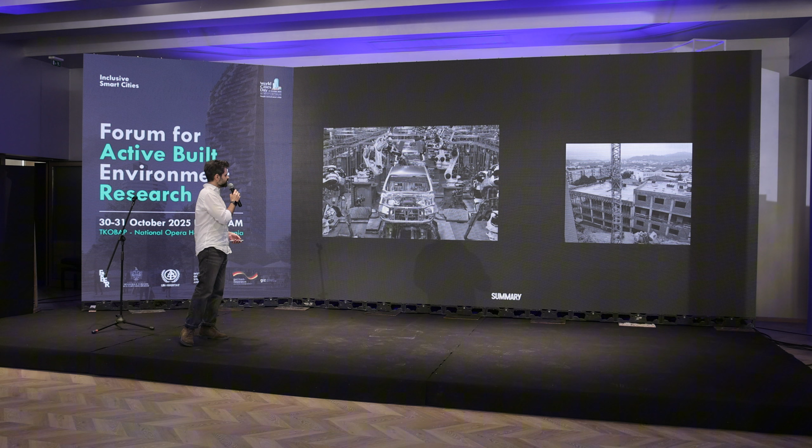So more than a century later, it is enormous, this disparity between the evolution of the automotive industry and the construction industry. Of course, we always have exceptions, but generally speaking, that's how we produce cars today, that's how we produce buildings today. And it's this delay of the construction industry that we are, let's say, fighting.

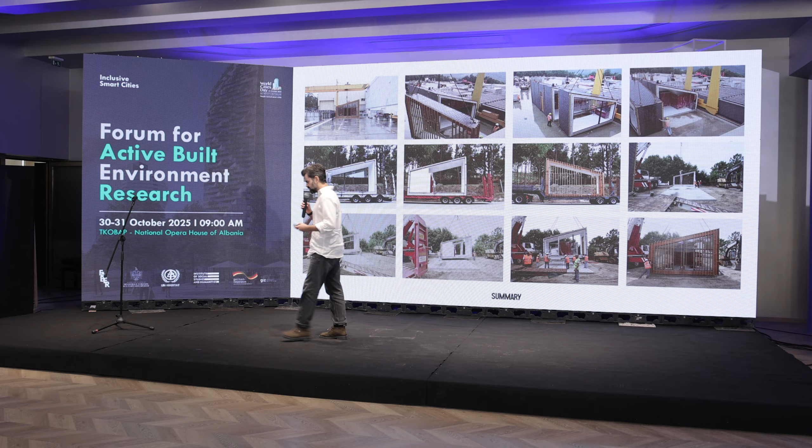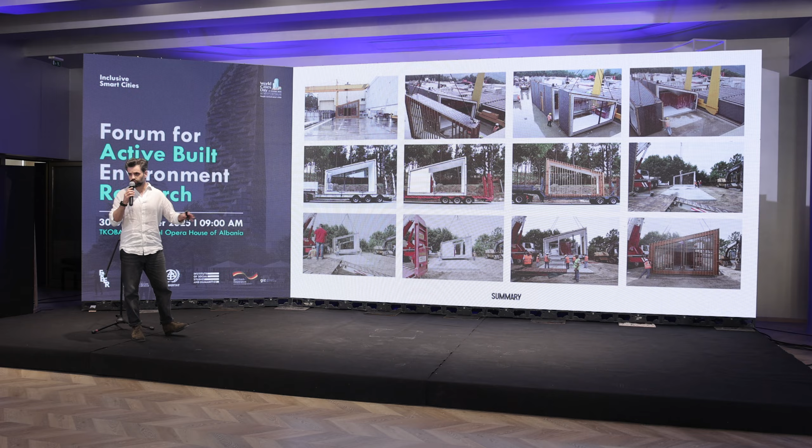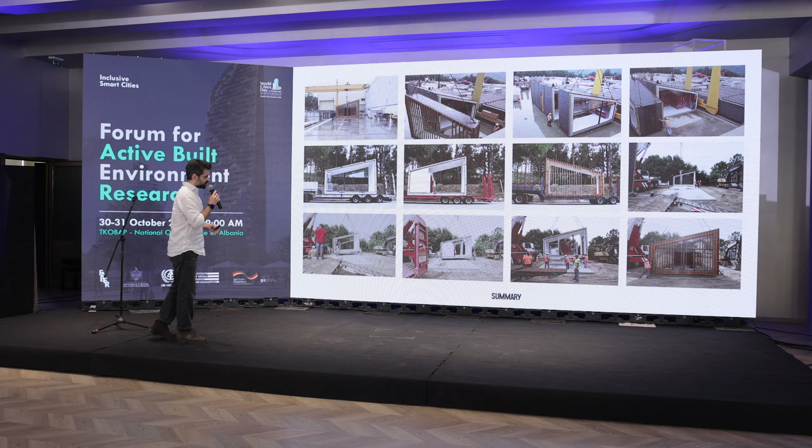We started 10 years ago doing it with, I would say, very modest means, far from the sophistication of the automotive industry. We just found a way to divide this prototype, this house, into 5 modules that were fully ready at the factory with all the claddings, the window frames, the furniture, etc., and we just assembled it on site in just 3 days. It was our first project, so it still has this special place for us.

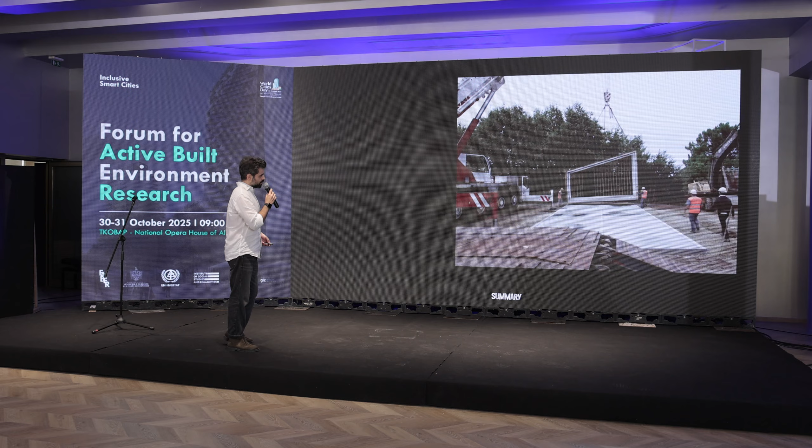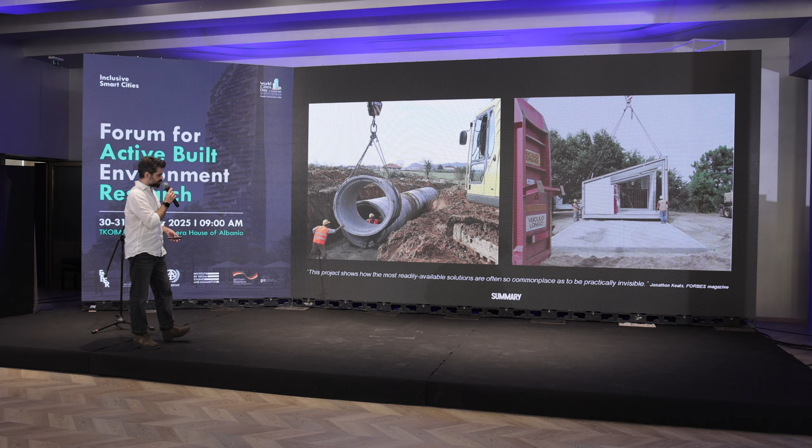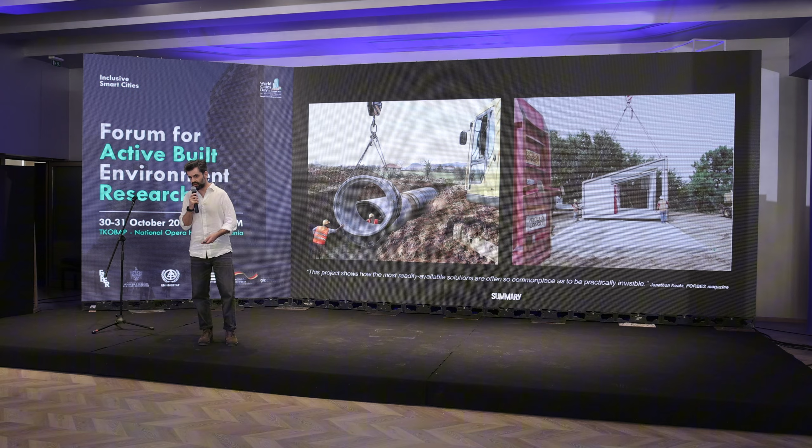But I always reinforce that we didn't invent this. We just took the idea of old sewer pipes and redesigned it to make it habitable. That's why I love this sentence from Jonathan Keats for Forbes magazine: this project shows how the most readily available solutions are often so commonplace as to be practically invisible. So our job as architects sometimes is not just about inventing, it's also about unveiling those hidden solutions.

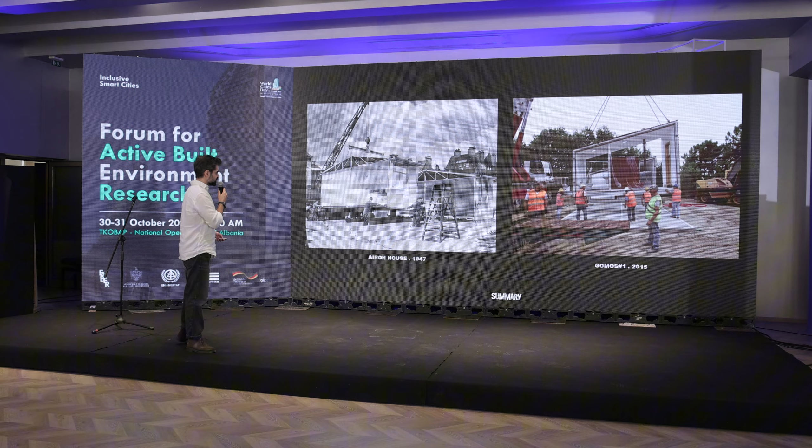It is a project 70 years older than ours, the AIROH House, and they were already using the same concept. We use concrete, but I would say the tectonic concept is quite the same—slices of the construction fully ready from the factory and assembled on site very quickly. Or the Zip-Up House from Richard Rogers—again, not innovation at all, it's reprocessing.

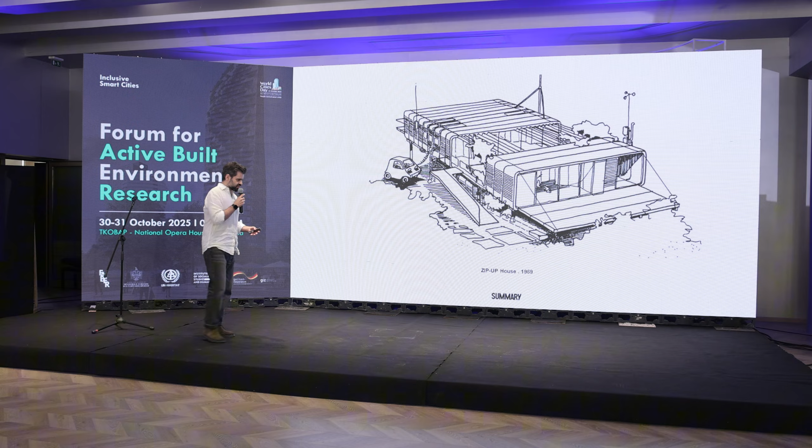So I would say that the history of prefabricated architecture is being built with cases like that—similar solutions being applied by different architects. It works as some sort of ecosystem of ideas that some architects manage to materialize.

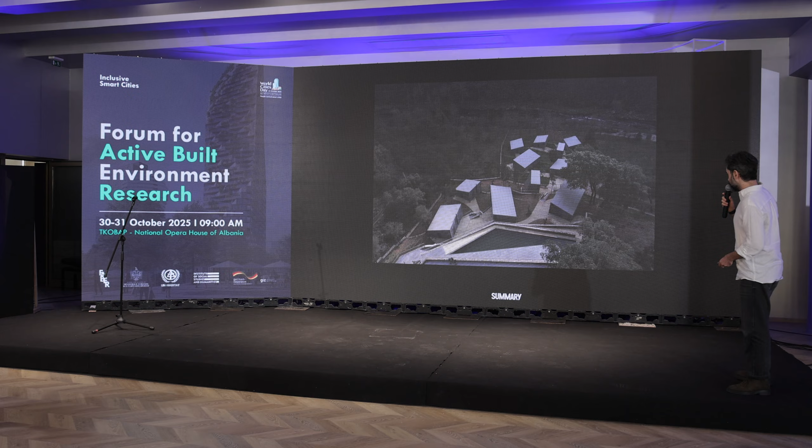After La Biennale, we got some commissions to develop projects with these three-dimensional modular systems. This is one of them: 11 cabins in the woods, on this hilly plot. In this case, we needed to divide each module into two submodules, a base and a top. The access was so difficult, the plot so remote, that we needed to divide the module to divide its weight, because we could not bring the big crane we normally use to assemble those modules.

This way it was possible to assemble the modules with a smaller crane, and in off-site architecture, I would say logistics are always part of the design. So we started by placing these units over the hillside, combining different positions with different orientations to make sure every unit has a view of the landscape and the river.

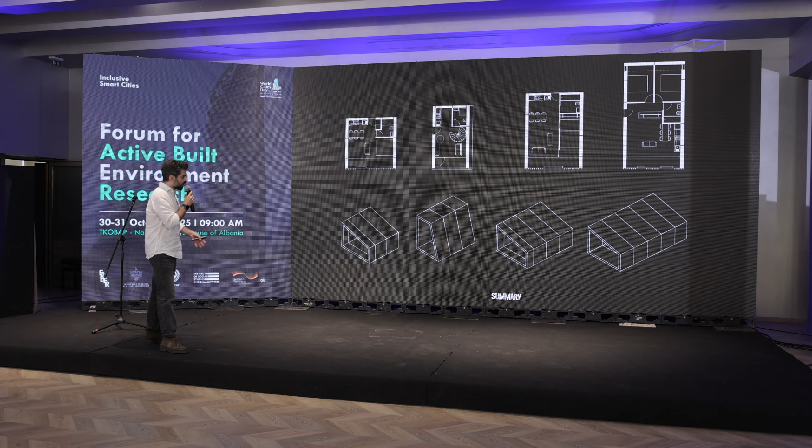So rather than rooms, they work as small houses—some of them may function as long-term accommodations, so they are not exclusively touristic and seasonal units. And we might have these different typologies by combining more or fewer modules, placing them horizontally or vertically.

We also used this project to start a new experience with this building system. Before, all the technical installations were inside all the modules. In this case, we did something different: we concentrated all the technical parts—water, electricity, and climatization—in this central module here.

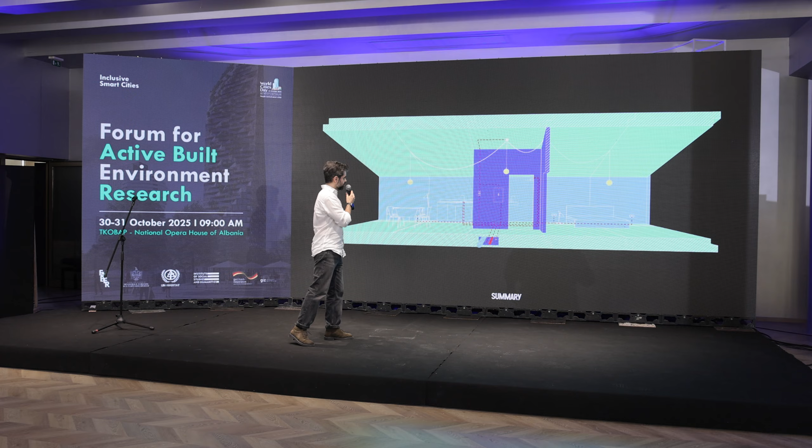So this is a central technical module, and these technical installations we take to the rest of the house externally. These central modules take longer to be produced, but all the others can be produced automatically with very little man intervention, taking roughly half of the time. That's why you see here the cable flying under the ceiling externally.

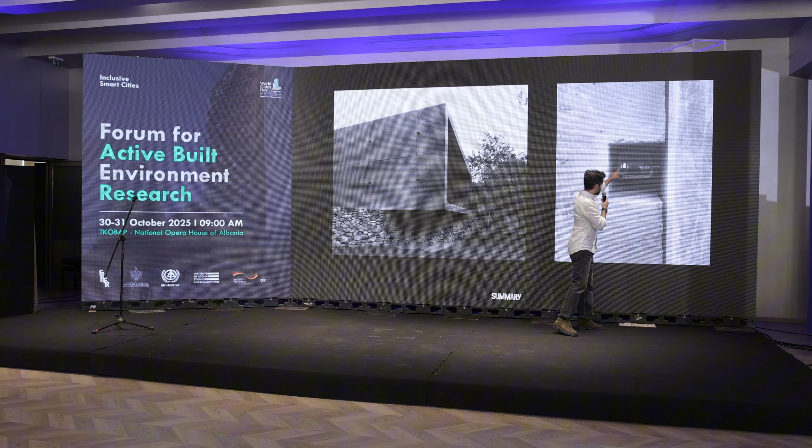Here we have the connectors between the different modules. They basically work as a central ring and two screws, each going to the correspondent module. The more we tighten these screws, the more we pull the modules together. Inside the joint we have an asphaltic rope, and when we tighten the screws, we smash this rope. This is what makes the joint completely watertight.

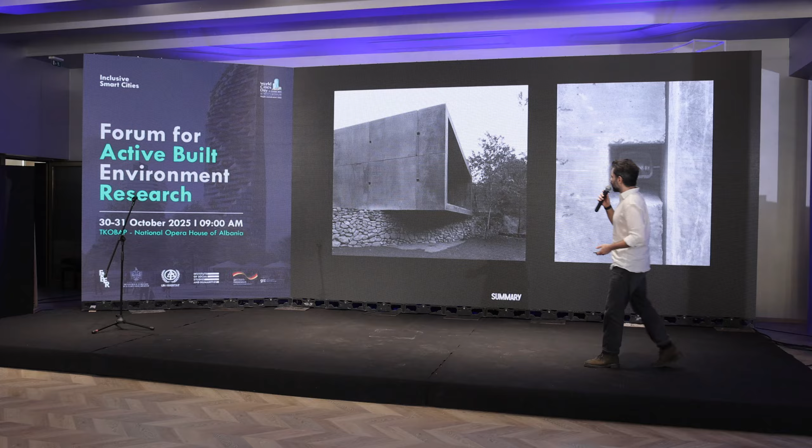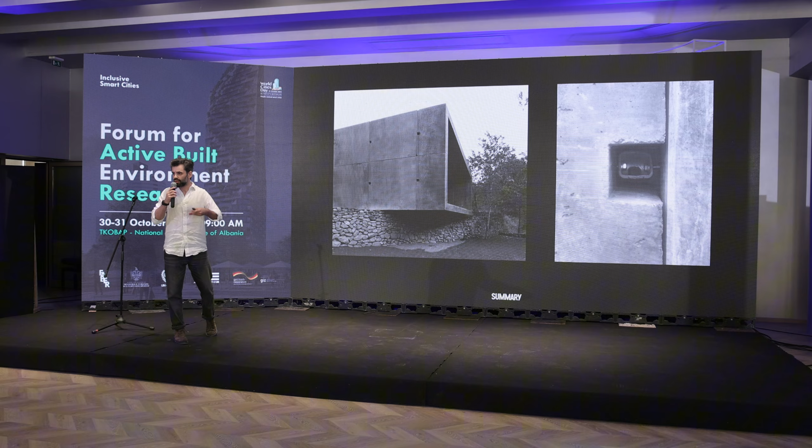As you saw before, this project is very close to the river, so we never know what the level of the water will be in the future. At some point we can just remove those connectors and move these modules, move this building somewhere else. So we make this effort to work with dry connections, so that we can approach this concept of design for disassembly as a strategy to potentially extend the life cycle of materials, the life cycle of the building components beyond the building itself.

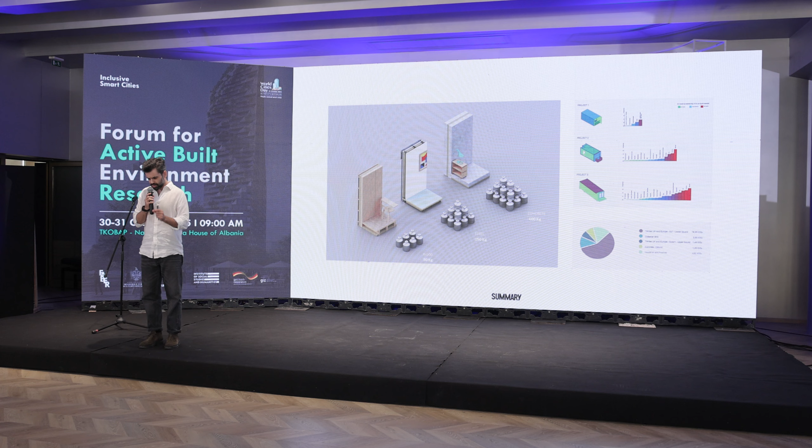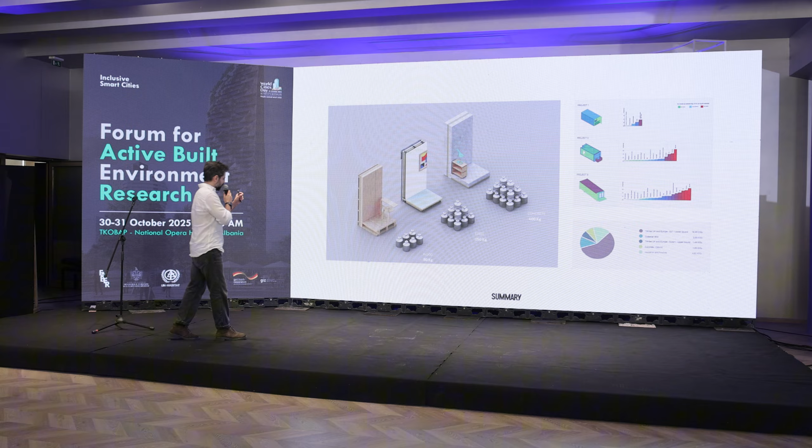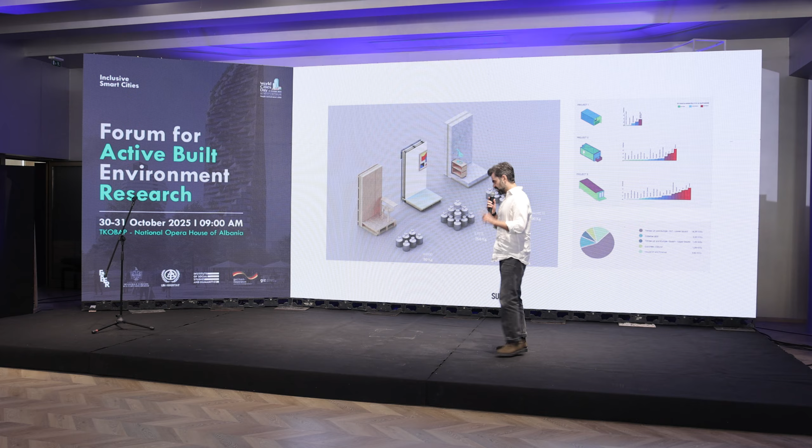And why is it important? It is important because we demolish too much and we produce far too much waste in the construction industry. In the United States alone, every year, more than 100 million square meters of existing buildings are demolished and replaced by new ones. 100 million square meters.

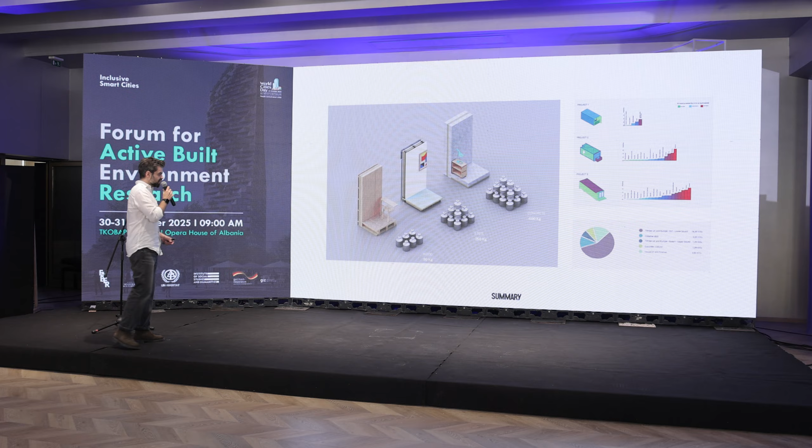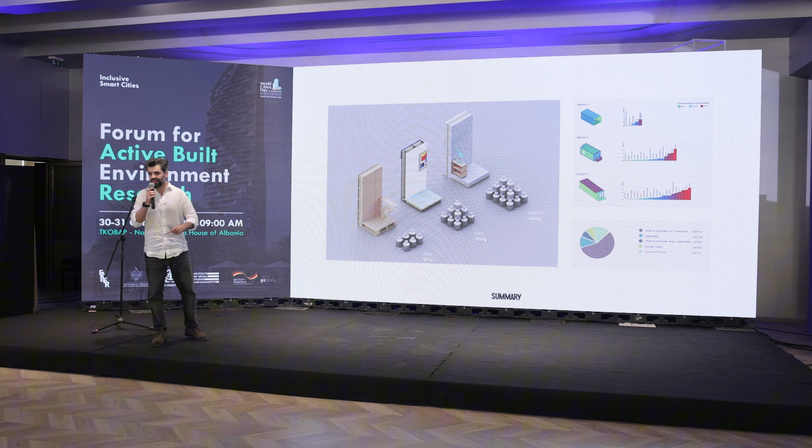We have been calculating the weight of the CO2 emissions of the construction processes of our buildings, and we are getting, per square meter, values such as 80, 250, and 400 kilograms of CO2 when working with wood, steel, and concrete respectively. So this is the invisible environmental weight that we need to acknowledge.

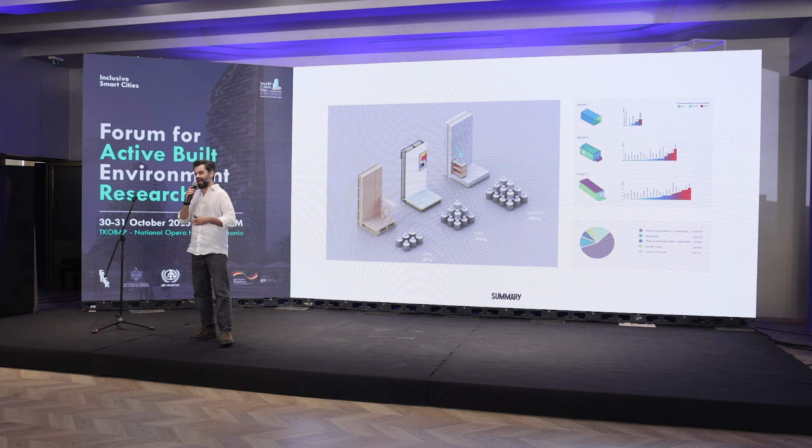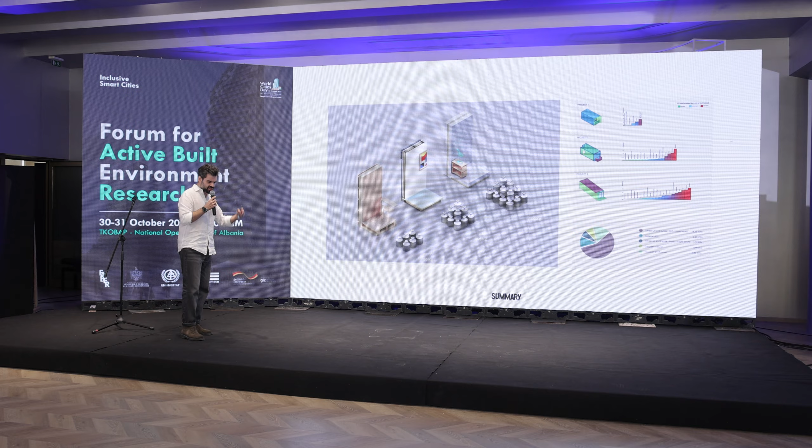We as a society reuse and recycle everything, from plastic, clothes, bottles, everything but buildings. And trust me, the building industry is the most pollutant one. I believe that through its potential for reuse and modular reassembly, off-site architecture is a powerful tool to tackle this problem, to tackle the construction waste.

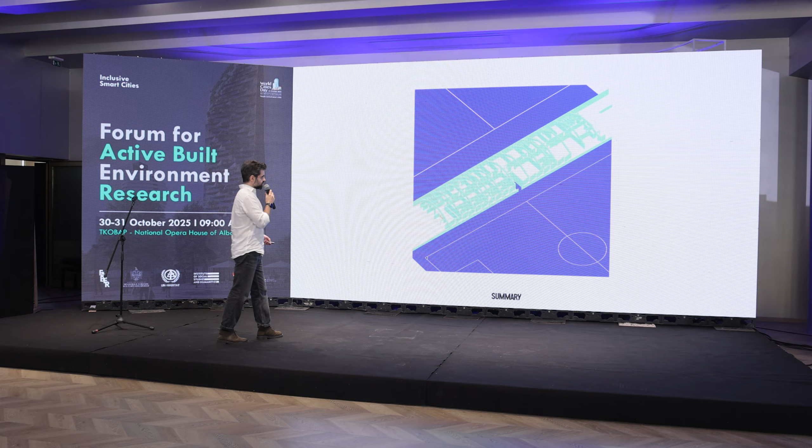A different project with bidimensional prefabricated elements started from a public competition for a sports center, to design 2 grandstands and 1 building, the typical sports center building with locker rooms, a bar, a medical center. The 2 main factors in the evaluation of this competition were the building price and the construction time.

So we compacted all these different elements of the program into a single structure. We have the grandstands one against each other. Underneath, we place the buildings, so the grandstands also work as the roof of the building at the same time, and all of these share the same structure. With this compaction strategy, we managed to accelerate the building process and also to do it in a very affordable way. So it's a very pragmatic and austere building, and I would say it is self-explanatory. Above, we have 2 grandstands. Below, we have a building.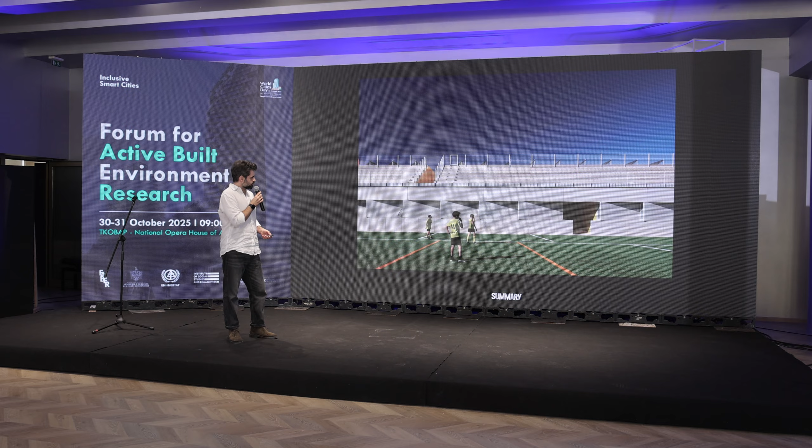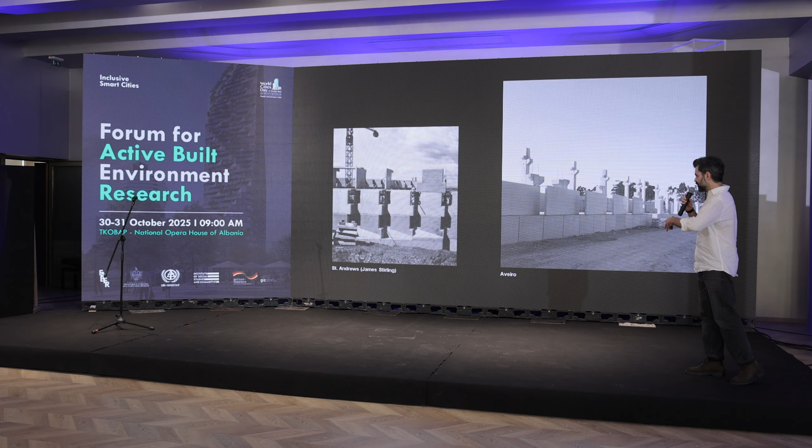And it takes me to the project of the St. Andrews Students' Residence from James Stirling. The influence is quite obvious, and I'm not just talking about using these big concrete panels as structural elements, but how we are using it to influence the design of the facade. So again, when working with off-site solutions, we are always working with references, and we are always studying these references.

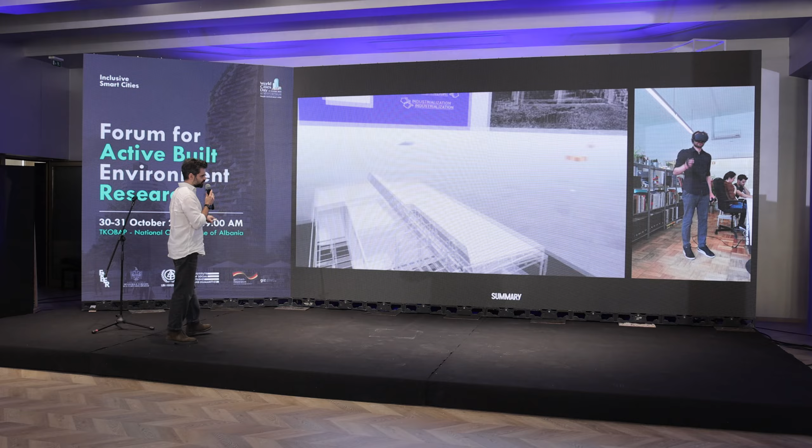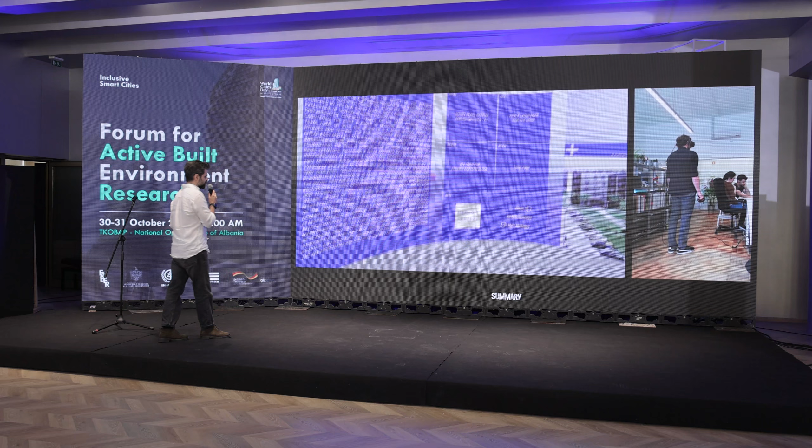That's why we developed this virtual exhibition, curating a group of 25 building systems that we considered important in the historical evolution of prefabricated architecture. In this exhibition we just showed the classical triptych of any architecture exhibition: images, texts, and models. But we do it in this virtual way, so it is almost an immaterial exhibition. By the way, we have been showing this exhibition in 7 or 8 countries, from Portugal to US to Germany to Scotland. But its very first edition was here in Tirana 7 years ago, in the frame of the Tirana Architecture Week. So it's good to be back.

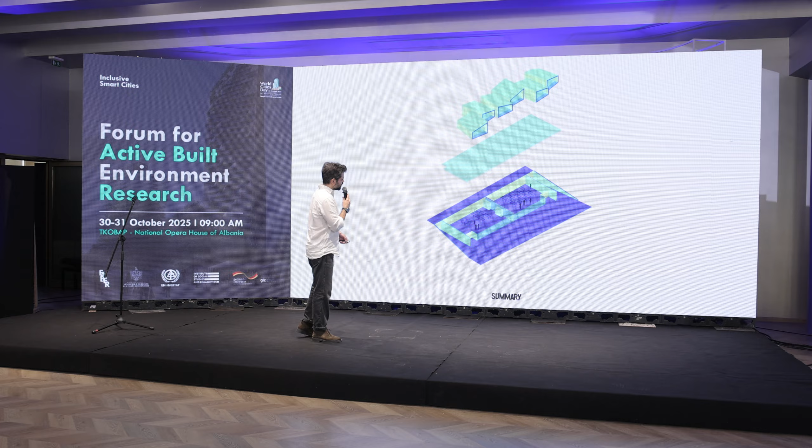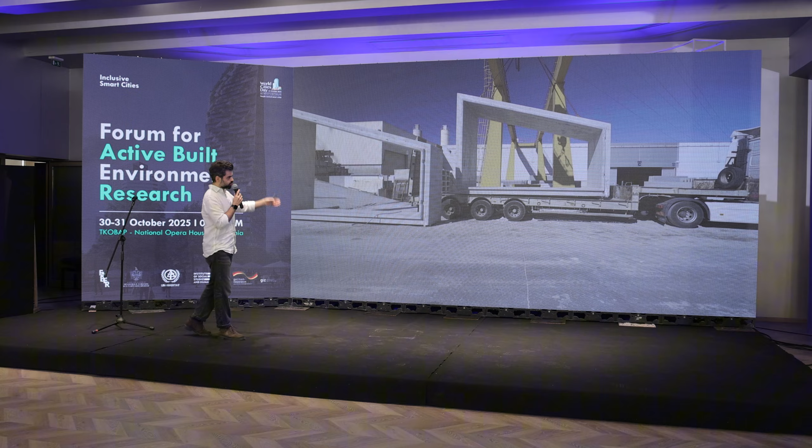In this project we used again these big prefab elements in concrete: 6 small apartments in the upper floor, and an undefined multifunctional space in the ground floor. All the structure is off-site, produced and stored in factory, and then, when it's the right moment, it is just assembled on the site in a very quick and clean way. So we used those panels in the ground floor, bidimensional. We used these volumes, 3-dimensional, in the upper floor, both with insulation from the factory.

The front facade is quite open, facing the public. So through this image you can understand the structure of the whole building. The back facade is quite more private.

The idea here was to design and license this building as a collective housing building, but keeping some advantages of individual dwellings, such as complete acoustic separation between the different units and a single entrance per each unit. Here we have the constructive details: concrete inside, concrete outside, but always insulation in the middle.

Those are the pieces as they leave the mold. We have concrete inside, concrete outside, no additional paintings, no additional materials.

This means reducing the manpower needs and the materials involved in the construction process, which also means saving time and money. Working mainly in the factory and reducing on-site works doesn't mean only rapidity, it also means giving better and safer conditions to the workers.

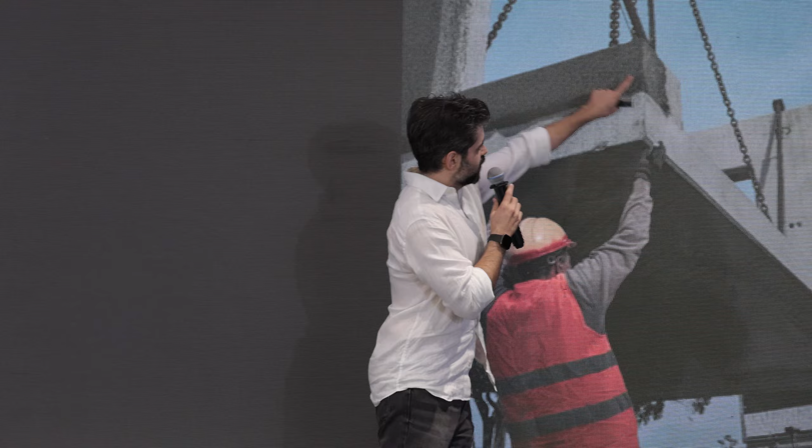Then we transposed it to vertical prefabricated panels, and later to these U-shaped elements with this external layer of rice husk. In this case, this external layer works as the outer cladding, but also as the thermal insulation of the building.

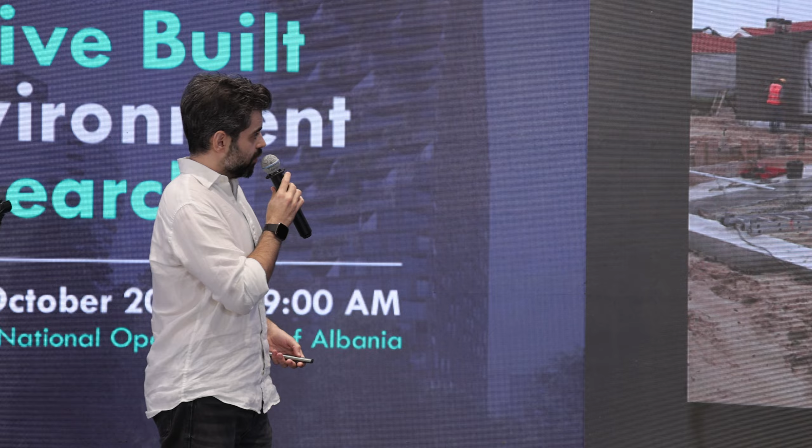So we used again the same pieces we used in the kindergartens to build this small prototype using this rice husk external layer. Okay, I'm just finishing with the last project.

Here we have 48 apartments. We have been working a lot with public housing in Portugal right now, and this is one of these projects.

It is the first time we are working with three-dimensional steel modules. So what we have here is steel frames that are cladded and finished in the factory, then stacked on site. It is a clear example of prefabricated, pre-finished volumetric construction, so PPVC.

In each module, we have these 4 square hollow section tubes working as pillars, let's say. Inside those pillars, we run threaded bars that clamp the modules together vertically.

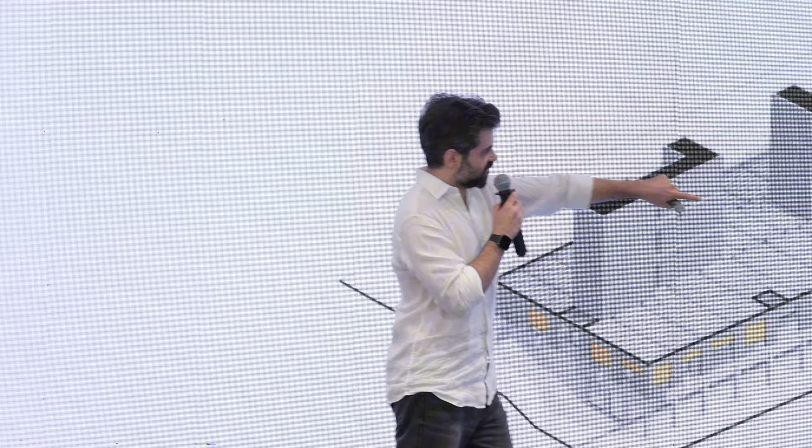Inside, we cast in the traditional way these 2 central cores with the elevators and staircases. They are essential for the seismic performance of the building.

At the same time, we are preparing those steel modules, and then we just set them in place. We anchor them to the central cores, and in the perimeter we apply this flashing to make sure the horizontal joints between the different modules are completely watertight.

So in each floor we have 28 modules composing 6 2-bedroom apartments. It is public housing, these apartments will belong to the municipality forever.

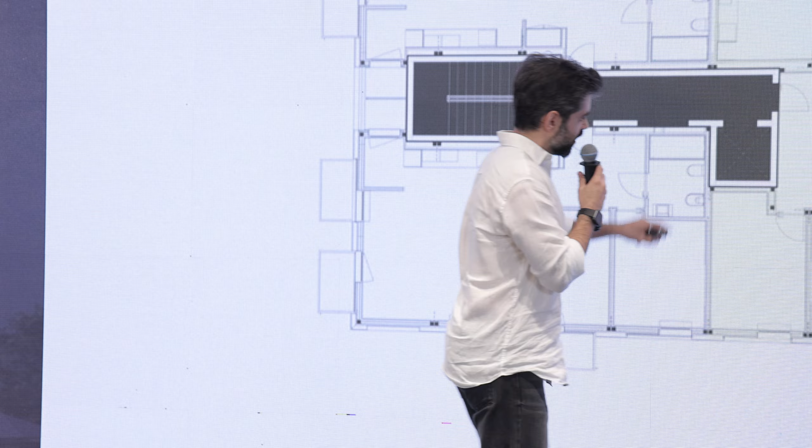In this scenario, flexibility was very important. So in these 2 central apartments, we just added this movable wall so that we have 2 2-bedroom apartments today, but tomorrow we might have 1 3-bedroom and 1 1-bedroom apartment.

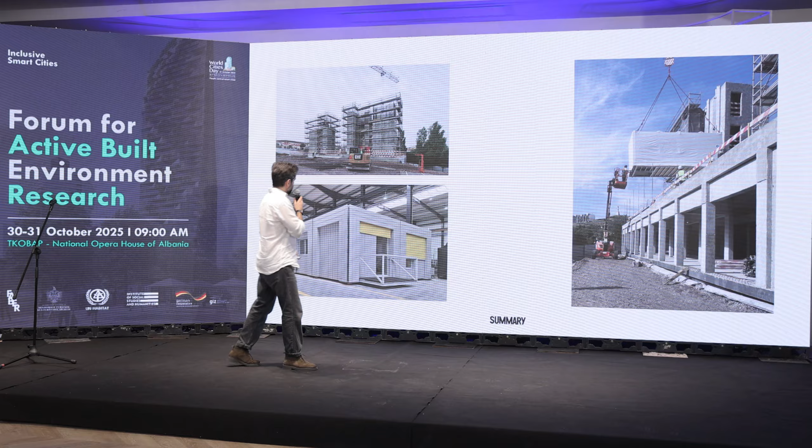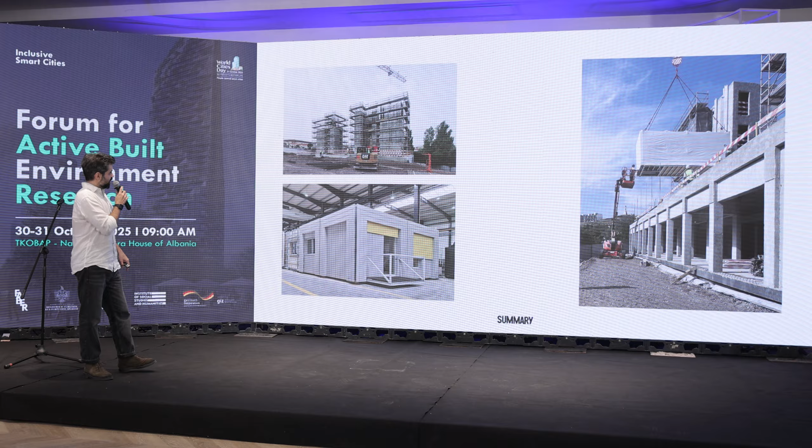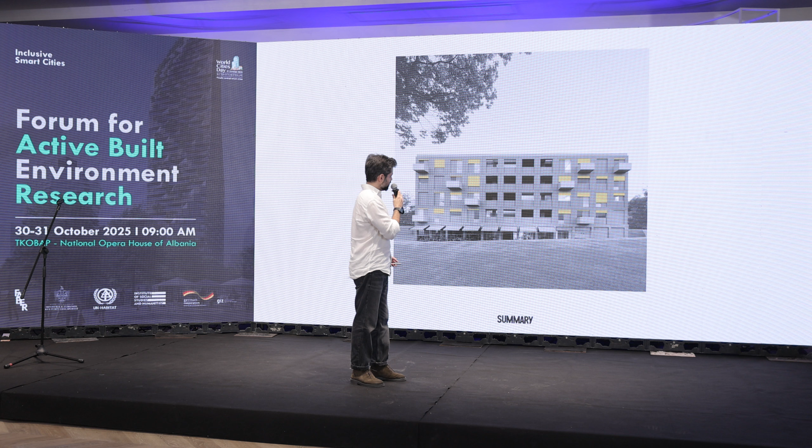As I said, the concrete cores are cast on site at the same time the modules are produced in factories, so no time wasted. Last week we just started applying the modules on site, so I hope this image will become reality soon.

Through this presentation I've been talking about logistics, clever techniques, numbers, and it is all important, but we still need to make it beautiful. That's, I would say, what architecture owes to people.

That's non-negotiable in architecture. Maybe I was not clear enough about that today, but there is always much more to design than just technical optimization, and this is what we strive for. Thank you very much.